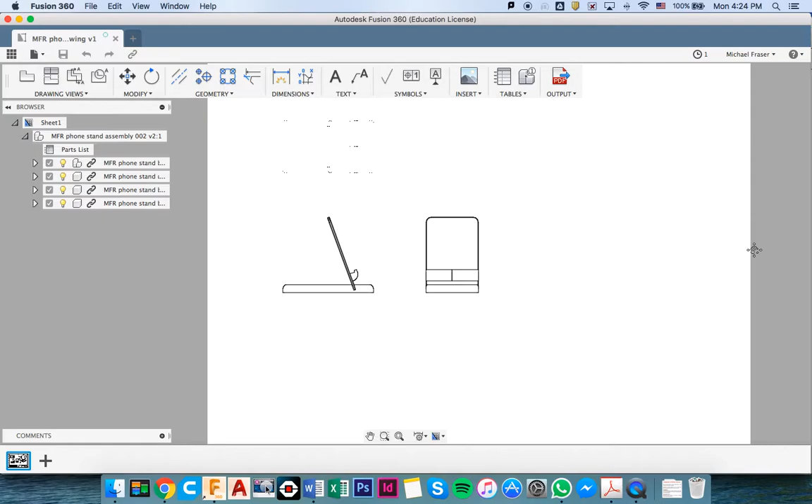It's actually really easy to do. Fusion 360 helps you out a lot with this drawing. You can see we've got a main view of our phone stand here, an end view, and a bird's eye or plan view here, then the three-dimensional view. The parts are labelled, so in part number 1, you come down here, item 1, one quantity, phone stand base, and the material is pine. Fusion's done all that work for us. It's actually a really easy drawing to do. So let's get straight into it.

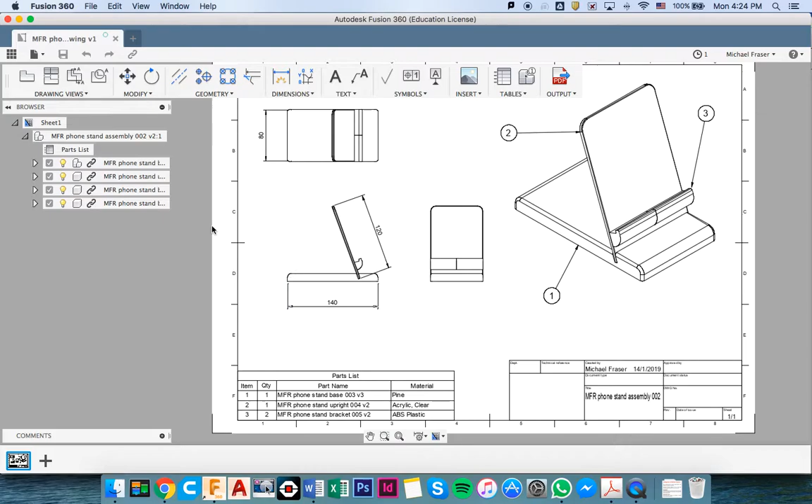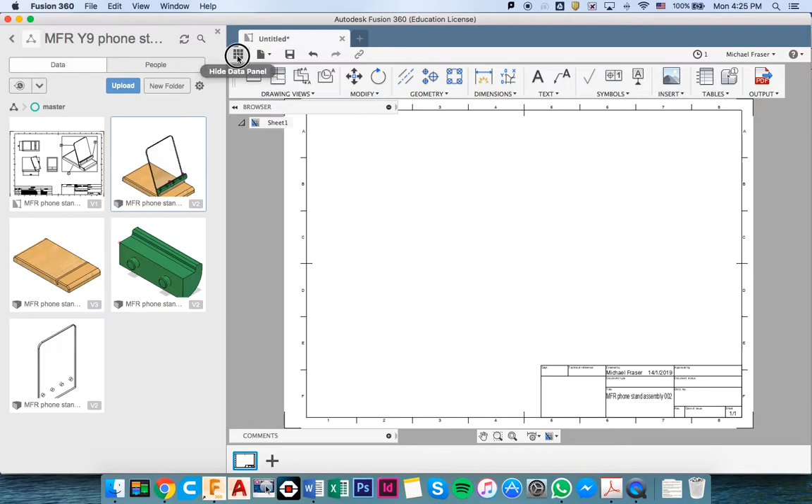We're going to come over here and we're going to two-finger click on our assembled phone stand and go new drawing from design. Now this is a little slow, so just be patient with it. And from here, before we actually start drawing, we're going to come across to the preferences menu. We're going to drop down there and come across here, go down to general drawing. And I just want you to check that all your settings are the same as mine.

I'm pretty sure that you're going to have to tick this box here to change this to third angle. And you may also need to change these variables up here so that they're the same as mine. So once your preferences are set the same as mine, you apply those and then go OK. You'll really struggle if your preferences are set differently.

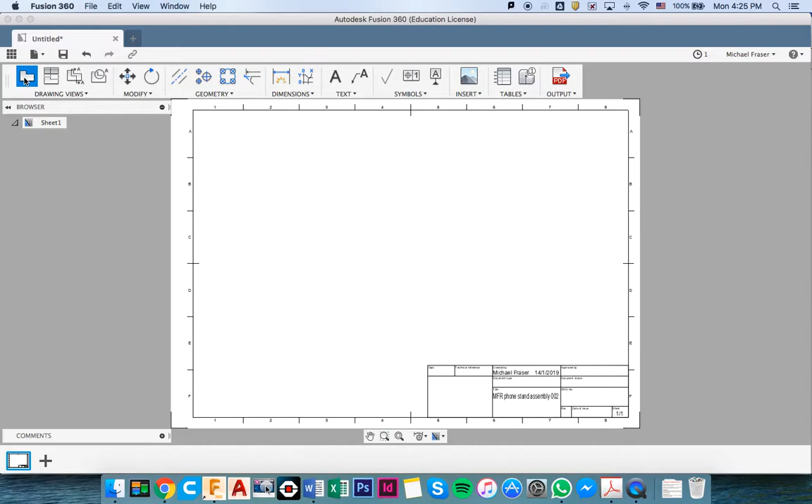Right, so now we're going to get straight into starting this drawing. We click the base view and it allows us to drag in the main view. We can just place that down there. Now you can change the scale of this, but I think you'll find that 1 to 2 is the best scale. It's going to fit on the page better than any of the other options. Now I'm just going to move that over here a little bit.

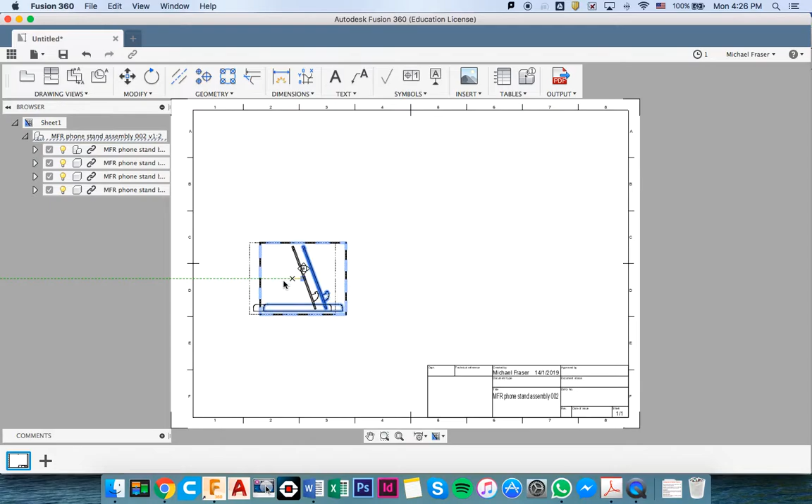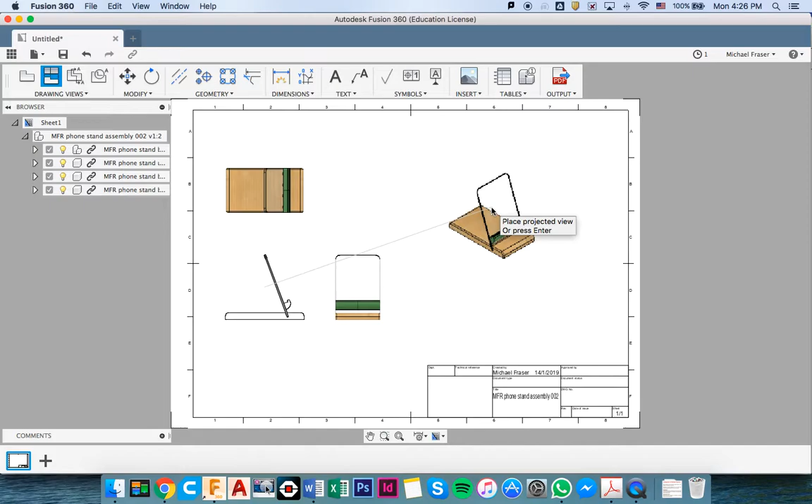And then from there we can do the projected views. So we can project this view along here, and we can project the plan view up here. We can also project the three-dimensional or the isometric view out here. Once you're happy with all of those, press enter. Now we're going to try and modify this. So if you double click on that, it'll bring up this option over here. Usually it'll be folded away like that and you'll have to unwrap it.

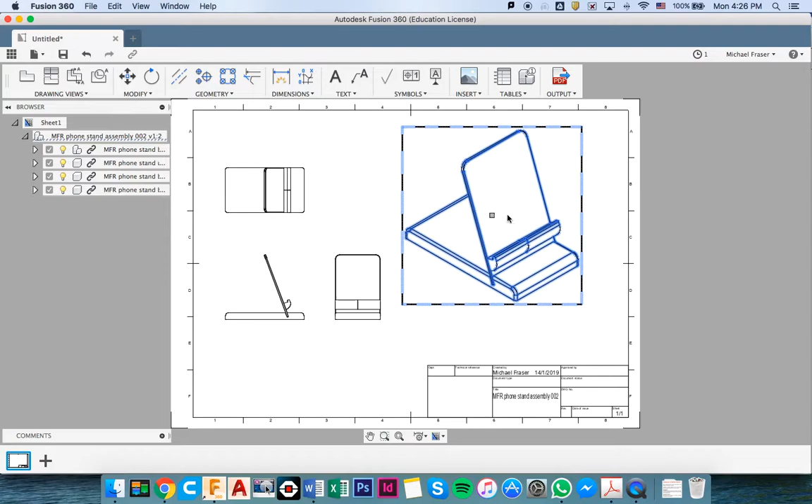And here we're going to change the scale for this to 1 to 1. I think you'll find that this is going to be better for that particular drawing, so it's a bit clearer. Again, just click on the center of that and drag it into a better spot. So that's our basic layout. And then we're going to put in the parts table. So we're going to insert table, and we just drag it down into that corner like that.

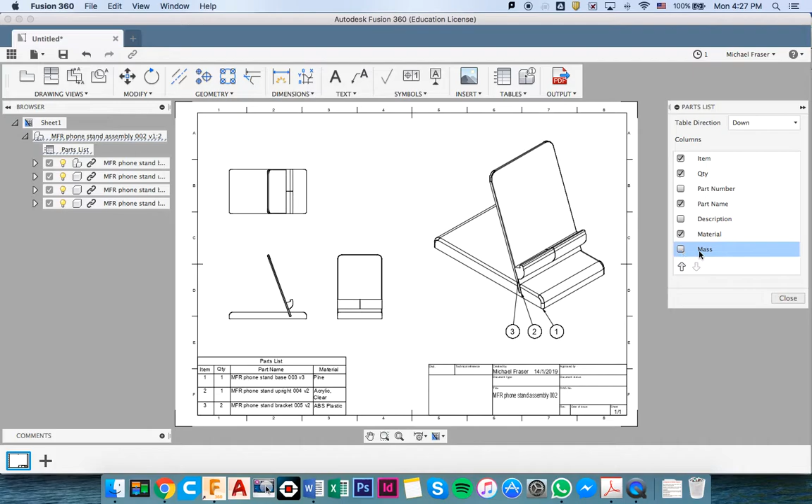If we double click on that, it's going to give us the option. Let's firstly change that down so it puts that table around the right way. We're going to take the description out, put the part name in and change that to part number. There's all sorts of cool things, like you can click the mass there and it'll tell you how heavy each individual part is, which is really quite a cool feature. Then we're going to close that. We can just stretch our table a bit.

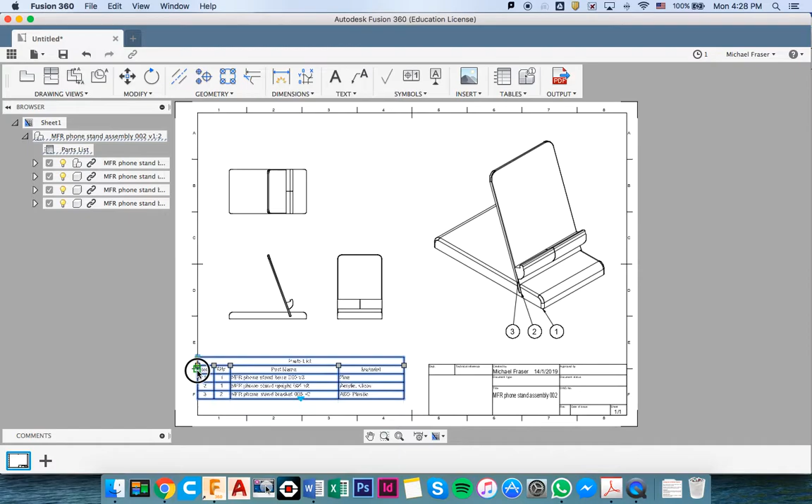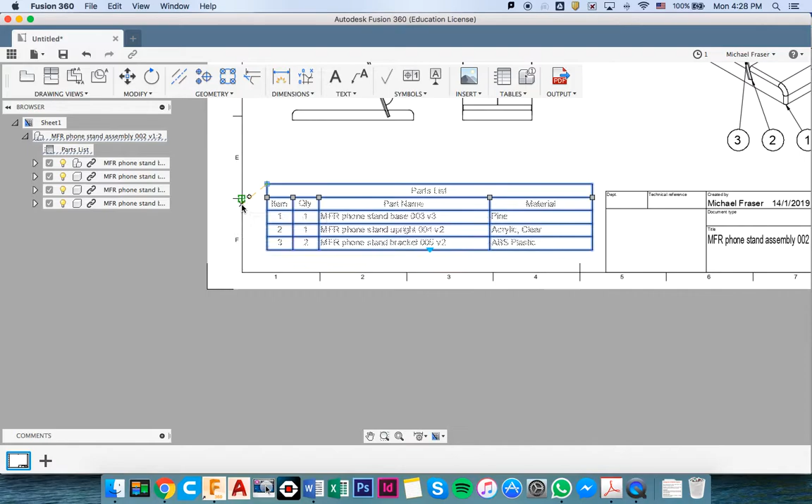Just zooming in so that we can move that to exactly the right spot. We'll just pull it out of the way for a minute. It's a little fiddly. There we go. And you can see once you put the parts list in, it's automatically numbered the components over here for you. But these arrows here are very confusing.

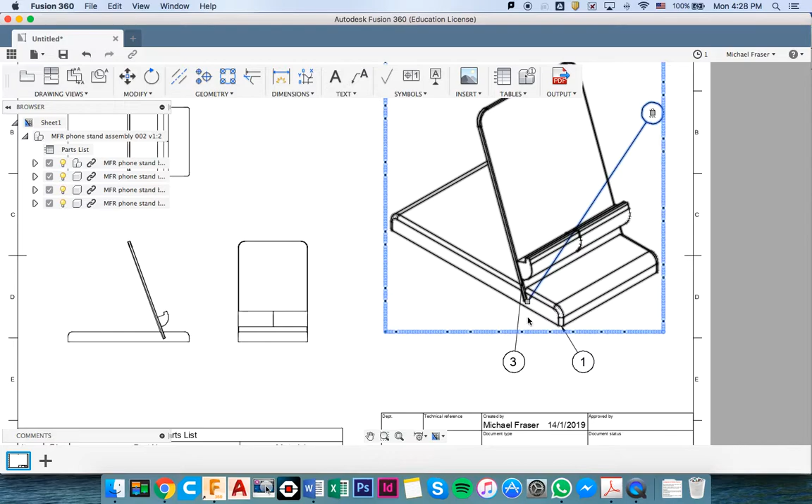So if you click on it and then you grab the grey dot, you can drag the grey dot, and same with the arrow tip here, and drag the grey dot, just put that there. And then this number 3, let's... number 1's okay there. Maybe it'd look better if it was over here.

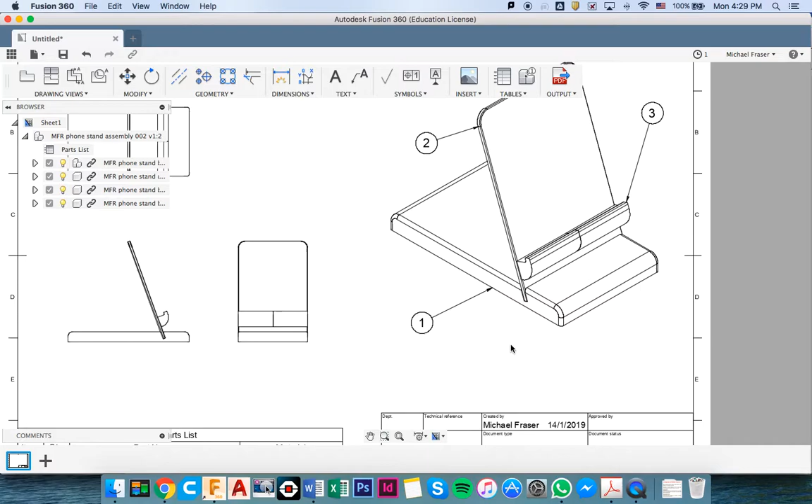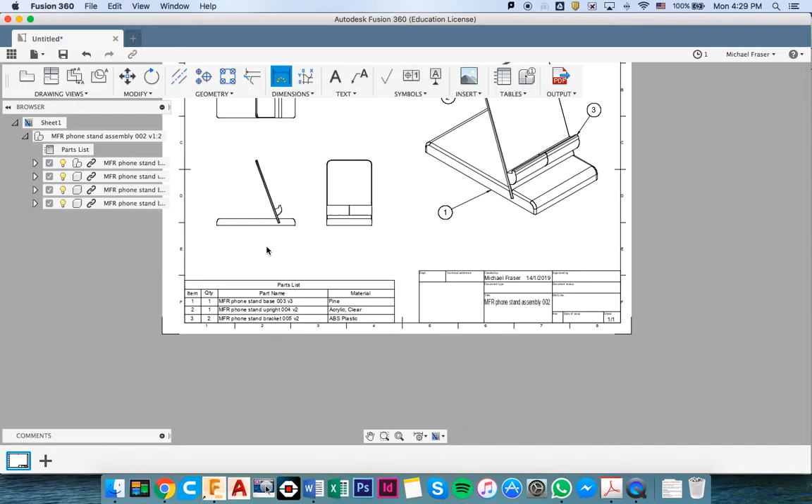So then we can zoom out. Yeah, you can play around with that until you're really happy with how everything looks. And the last thing that we want to do to this drawing before we save it is to dimension it. So you can use the dimension tool here. And again, I'm going to zoom right in.

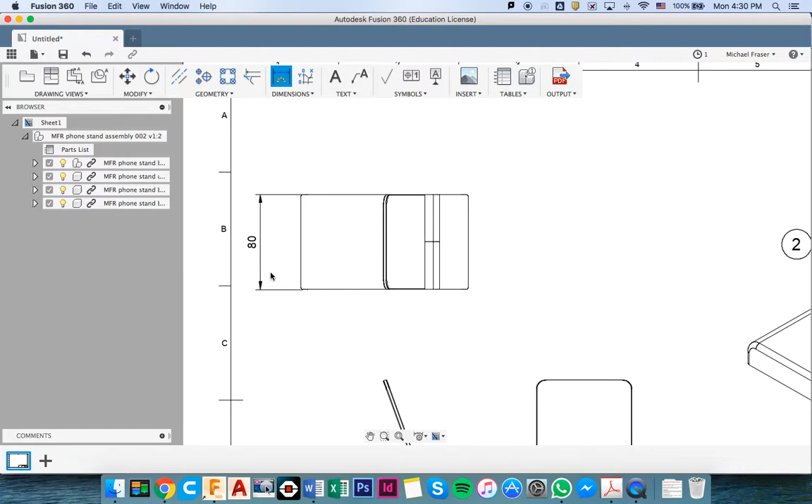And you may need to click right in that corner to right in that corner, drag down the 80. We're just dimensioning the main dimensions on the drawing. We're not dimensioning all the little details. Now, I know this is going to be tricky, but I'll do my best to show you. I'll try and dimension the length of this diagonal as well. So if we click there, we go, dimension that.

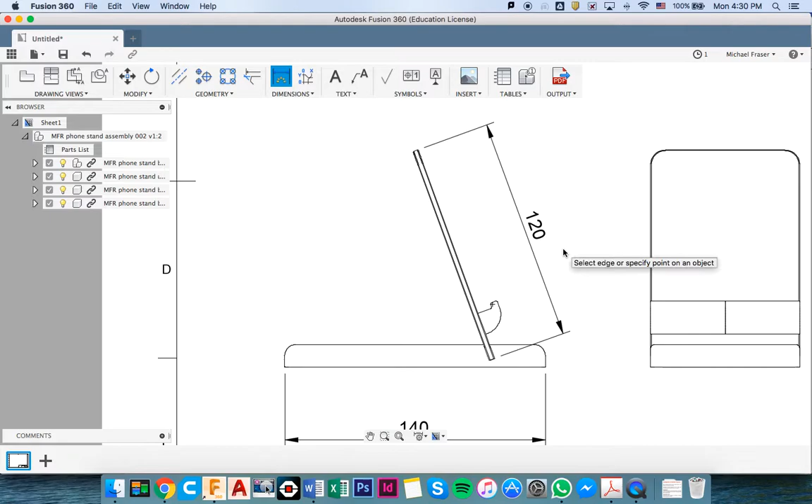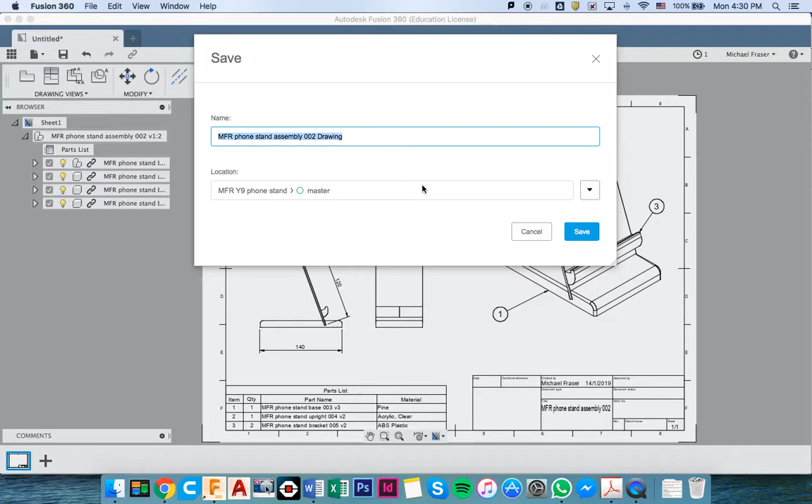Can you see I'm dragging these dimensions a good distance away from the drawing so they don't clutter the drawing or detract from the drawing itself? If you wanted to go in and add some more little dimensions, you could, but those are the major ones we want on our drawing. So that's our finished drawing. We want to save that. Command S. This is the second time I've done the drawing, so click Save.

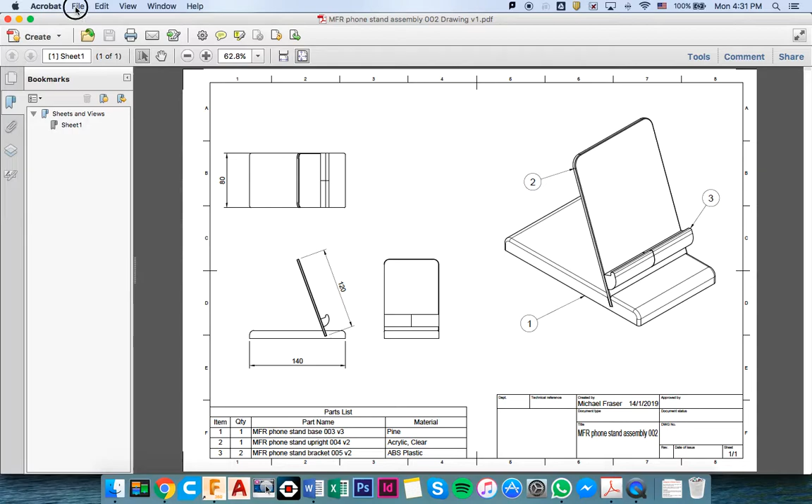And then you want to output this as a PDF. And let's open it and go OK. I'm happy for that to save onto my desktop for now. And there it is as a PDF, all ready to go. Now, it's also a good option now that you've got it in Adobe to save that as an image, as a JPEG.

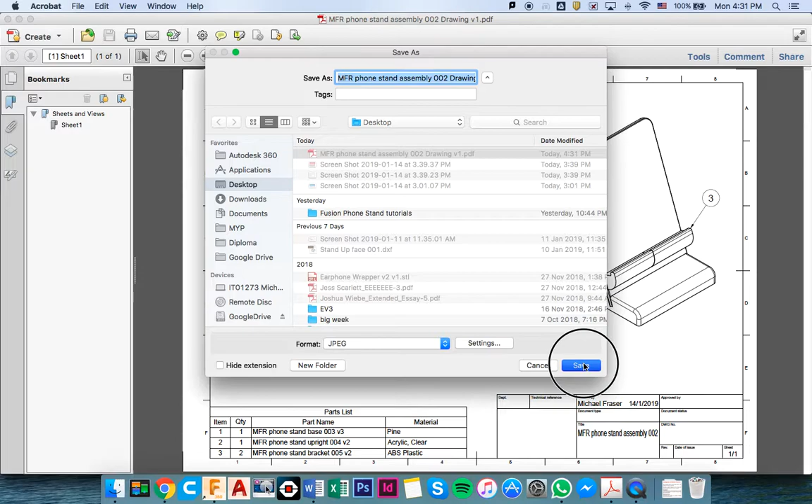And just make sure you set as a JPEG down here. Settings, we'll just leave that 300 pixels per inch. That's a very high quality image at A3. Let's go down to 150 and then go Save. If we scroll to my desktop, here it is here, so we can open that up. Now that JPEG is much easier for you to drag or copy into your Google Slides.

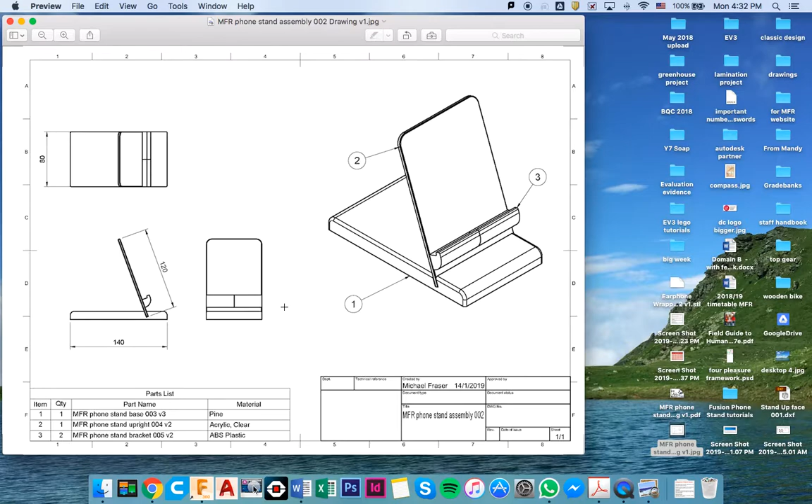We don't want to see anyone taking screenshots of these drawings. When you do a screenshot, you get a really low quality image, and it's not really of the professional standard that we're expecting. So make sure you follow those correct steps with the output as a PDF, and then you can save it as a JPEG, and it's easy to import into your drawings.

Righto, so thank you for following tutorial 4. We've got one more tutorial to come on how to do a final rendering of your phone stand.